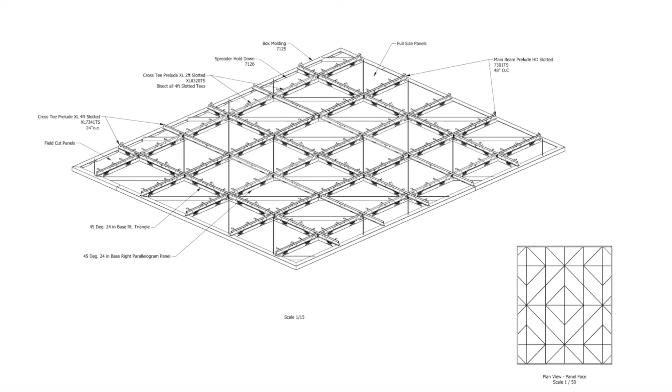For these 2D shapes, let's install a 2x2 prelude grid with slots in the flange to accept torsion spring panels. Mains install on 4-foot centers. 4-foot cross tees install on 24-inch centers, while 2-foot tees bisect the 4-foot cross tees, creating fully slotted 2x2 modules for maximum panel configuration options.

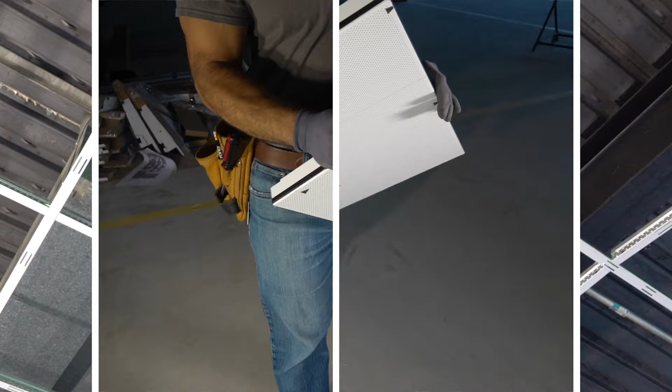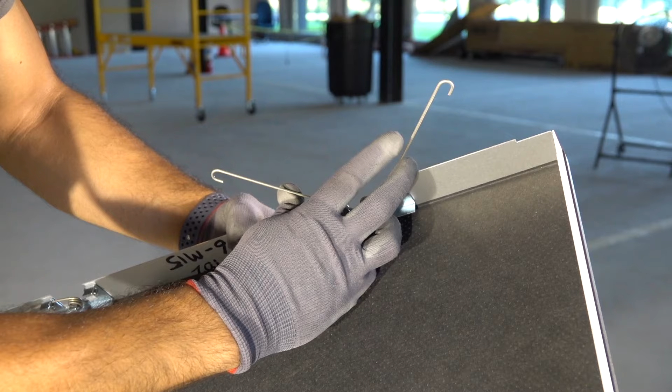Panel geometry starts with new, durable factory-applied gaskets which maintain an 1/8-inch panel-to-panel reveal. Once you release your torsion springs, you'll notice we've added built-in spring stops that protect the panel face should you let go of a spring.

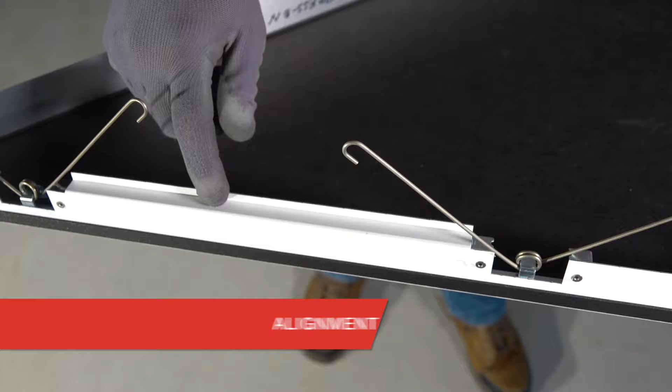Between torsion springs, we've built in an alignment flange to the panel upturn, which ensures perfect panel alignment once the panel is installed.

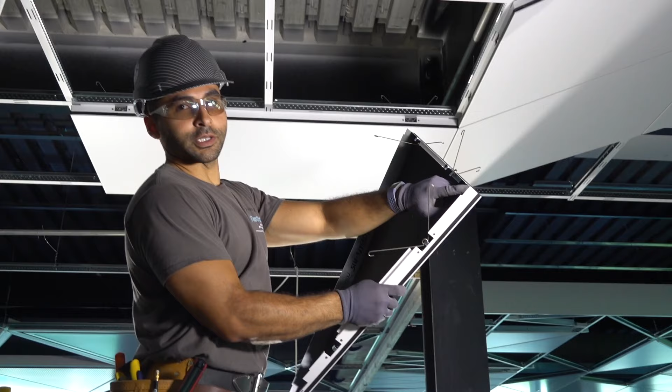Panel corners need to always occur at a grid intersection with the alignment flange fitting securely between the grid flanges. Torsion spring panels engage the slotted grid while lifting the panel securely into place.

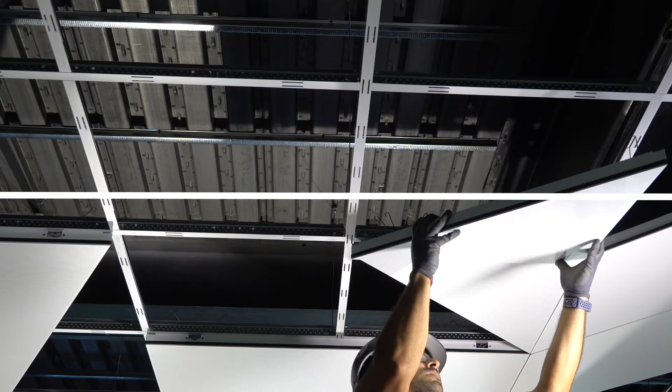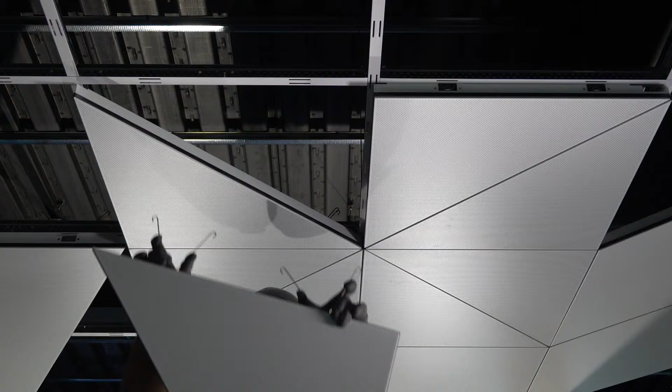Let's work our way around an installation of 8 right triangle panels that converge upon a common center to show how the modular 2x2 slotted grid assembly accommodates off-module panel sizes. 2x2 modules can easily interface with triangles, trapezoids, and parallelograms.

Larger format shaped panels install the same way as the smaller panels that you just saw.

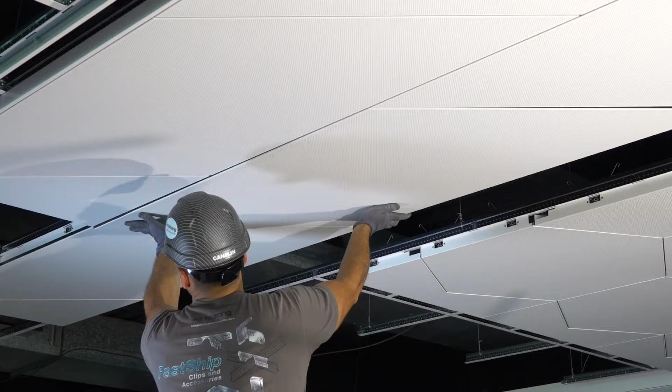Let's move on to hexagon shaped panels. This panel shape also installs to a square module grid system, however the mains and tees lay out a little differently. First, you'll install slotted Prelude heavy-duty main runners on 30-inch centers.

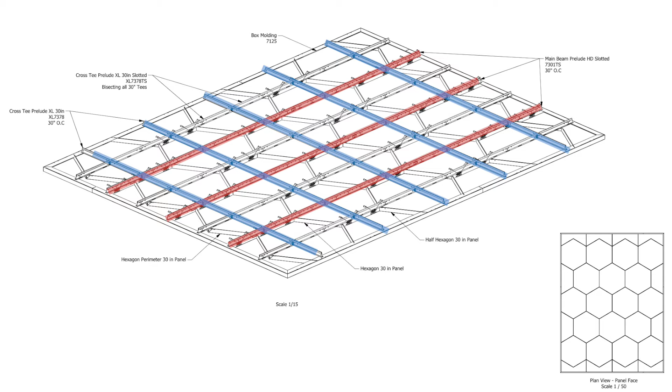Next, install unslotted 30-inch cross tees perpendicular to the mains on 30-inch centers. Finally, you'll install 30-inch slotted cross tees on 30-inch centers parallel to the mains. The resulting 15-inch on center slotted grid spacing, referenced by the red and green lines, accommodates the staggered installation layout of hexagon panels.

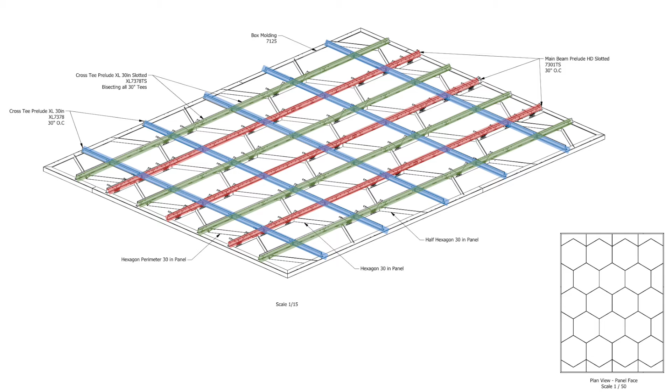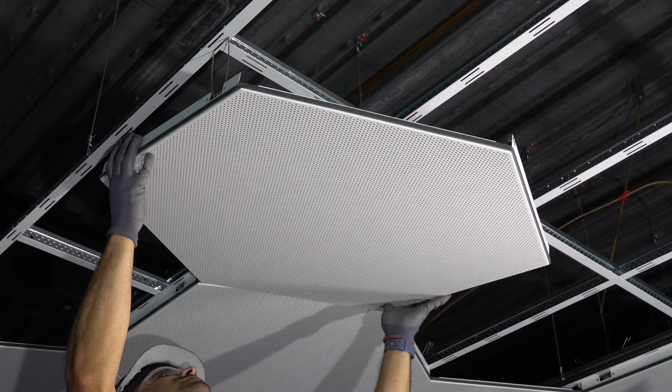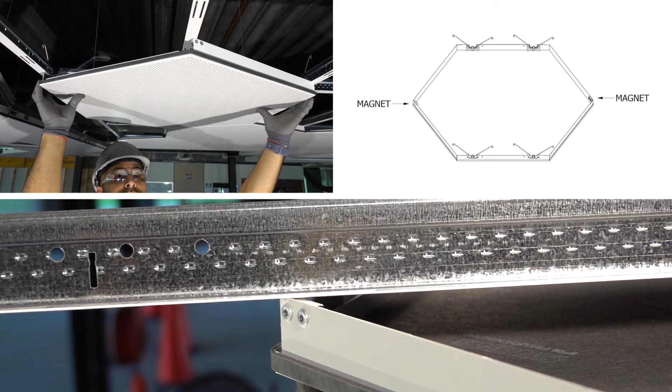Hexagons either hook to slotted parallel mains or slotted parallel 30-inch cross tees, which achieves that staggered panel layout across the ceiling plane. With torsion springs, only 2 panel sides are supported. We also need to support the 2 cantilevering non-spring sides. We do that with strong factory-installed magnets that securely engage to the metal grid system.

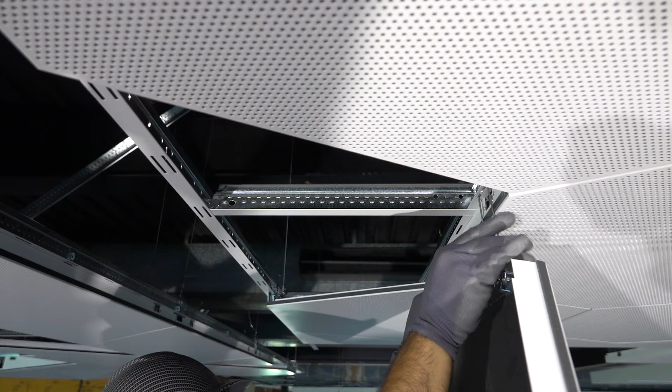Armstrong offers 2 hexagon half-panel shapes for squaring off parallel perimeters of floating or transitioning installations. One half panel is designed to be used down one perimeter run, while the other is used when your perimeter turns 90 degrees.

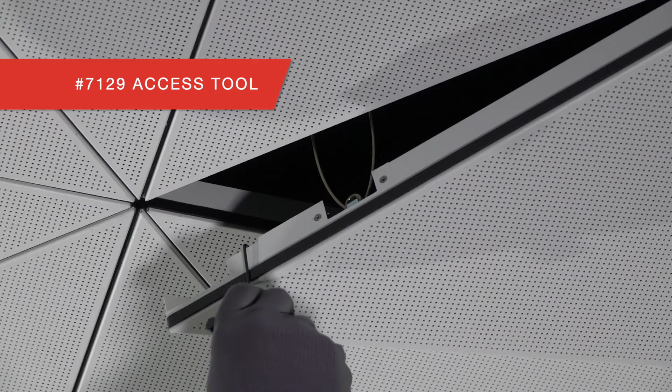Use the Item 7129 tool for accessing any of the MetalWorks Shapes torsion spring panels. Insert the tool at the panel corner where a torsion spring exists. Rotate 90 degrees, then pull downward for easy access to the plenum.

Panels reinstall easily. Now, you don't live life in 2D, so let's go the extra mile and shake up your ceiling topography with 3D panels. The wow factor is built right in. Create dynamic visual landscapes with movement, flow, and fun.

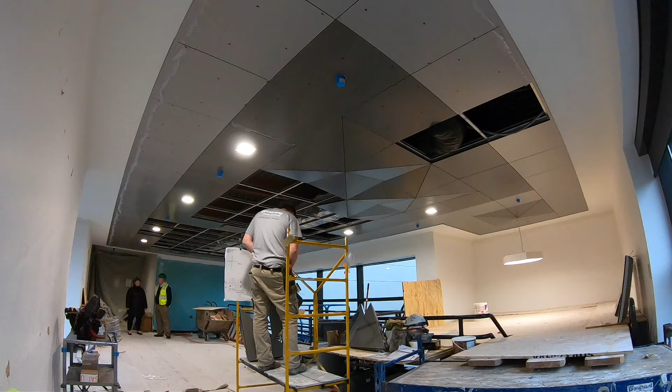Armstrong MetalWorks 3D panels add a true sculptural quality designed to astonish and impress. They are easy to install too.

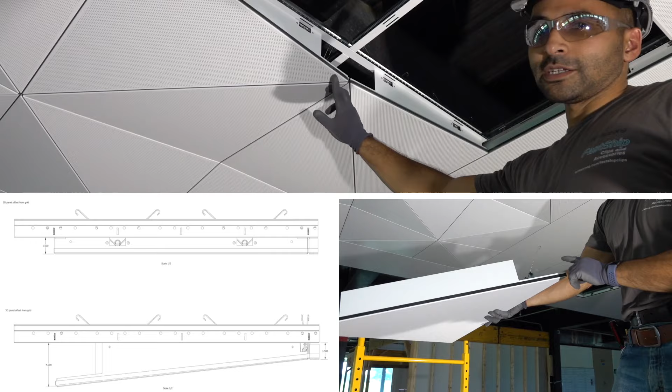Let's take a look. A standard 2D panel has 1.5-inch upturned edges. 3D panels have tapered 4-inch upturns that transition to a 1.5-inch upturn. The combination of these offsets is what creates the sculpted 3D visual.

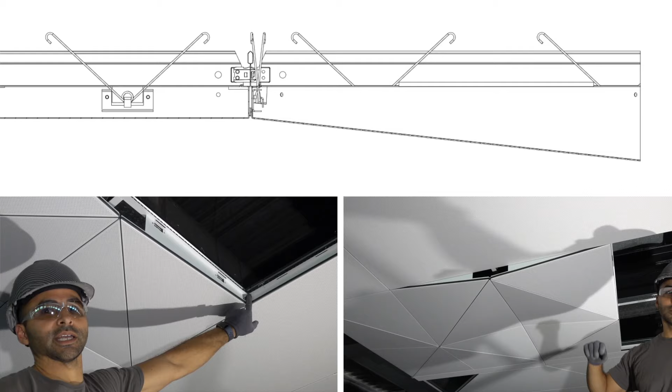You can mix 2D and 3D MetalWorks Shapes panels for maximum design flexibility. Matching panel upturns integrate with opposing matching upturns. Be careful not to mix opposing unmatched panel upturns, or this will be the result. As long as the neighboring panel upturn depth is the same, your installation will flow from panel to panel.

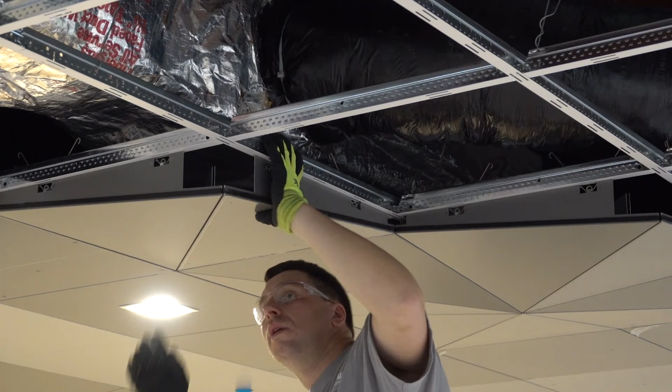3D Shapes panels are only available in triangles. It's the combination of these triangles that achieves the unique sculptural depth.

All MetalWorks Torsion Spring shapes integrate with linear lights and air diffusers by using 4 or 6-inch technical panels. Combine this with partner solutions that are pre-qualified for fit and finish while using standard components.

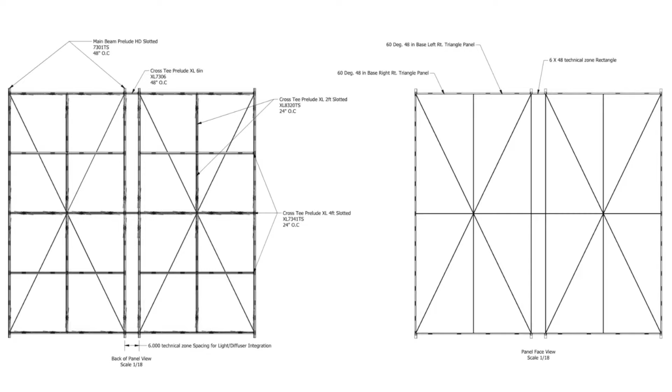For triangles, trapezoids, and parallelograms in 2D or 3D, mains can run parallel to the technical zone. For continuous layouts, the Tech Zone yoke is available. Mains can also run perpendicular to the technical zone.

For hexagon panel technical zone integration, mains must run parallel to the technical zone. Hexagon half panels square off the installation at the technical zone.

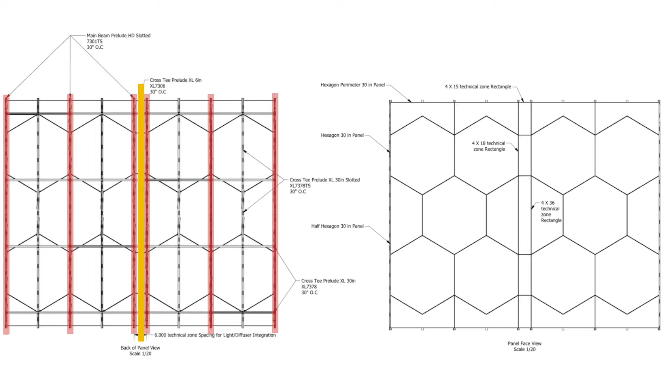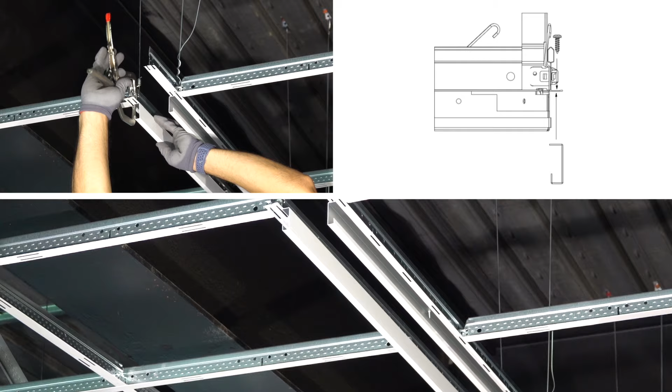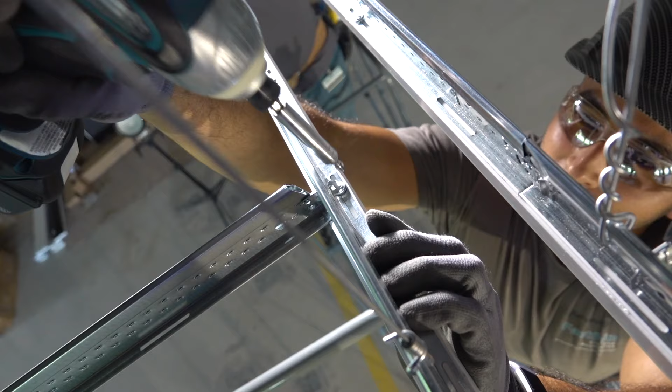If you're going to run continuous fixtures in your technical zones, we offer continuous linear light trim. This beautifully transitions from light to panels while maintaining that crisp 1/8-inch reveal from trim to panel. The trim is easily top screwed into place and it does not interfere with the panel's torsion spring to slot integration.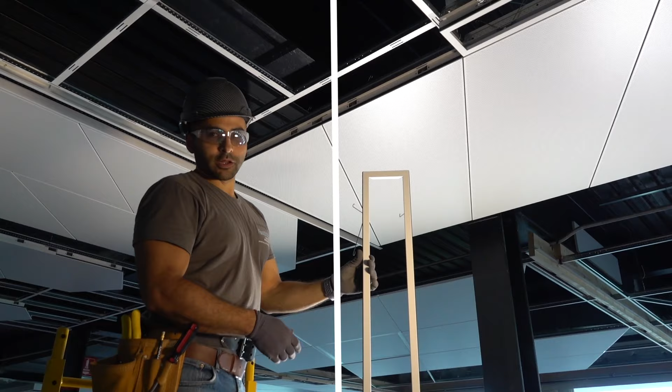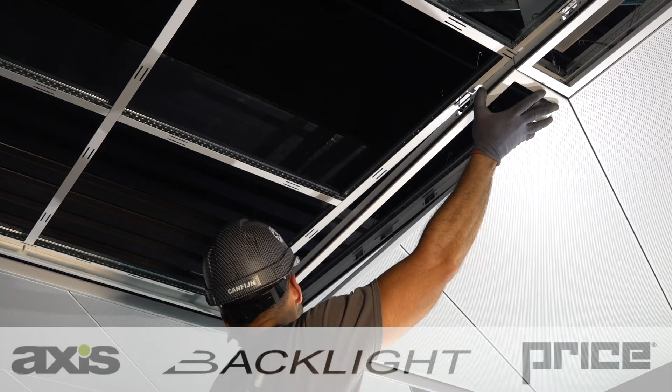For all MetalWorks Shapes installations, we offer metal panels with cutouts for linear technical zone lighting. These install to the technical zone with torsion springs, ready to accept our partner fixtures. Technical zone fixtures will need to be independently supported.

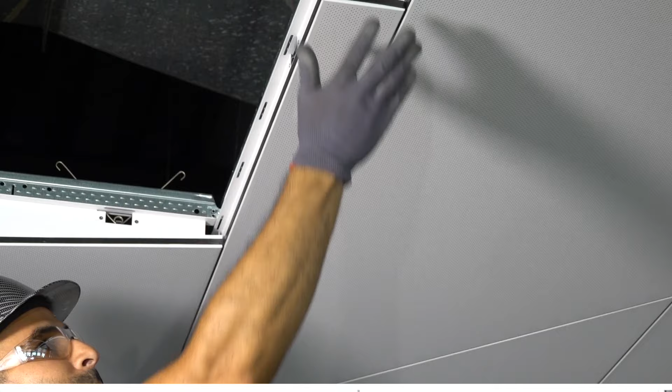Solid torsion spring panels are available for areas with no MEP. Axiom and MetalWorks trims simplify cloud installations.

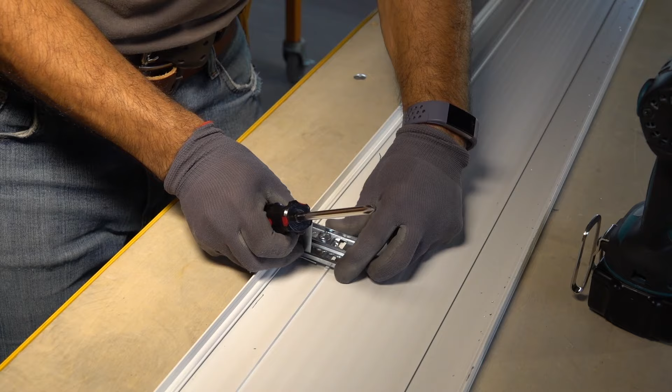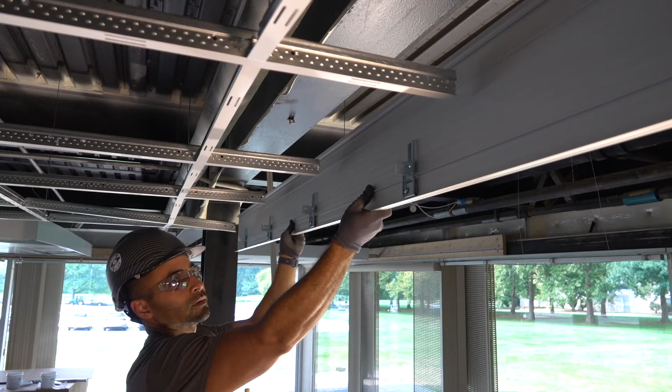The popular ATC adjustable trim clip perfectly trims MetalWorks torsion spring shapes, just like it does just about every other ceiling that we manufacture. Adjust the ATC to your ceiling depth, which in this case is 1.5 inches. Raise up your trim and clamp to your grid on 24 or 30-inch centers. Then screw attach.

Wall or trim perimeter cuts are fast and easy with a metal cutting circular saw.

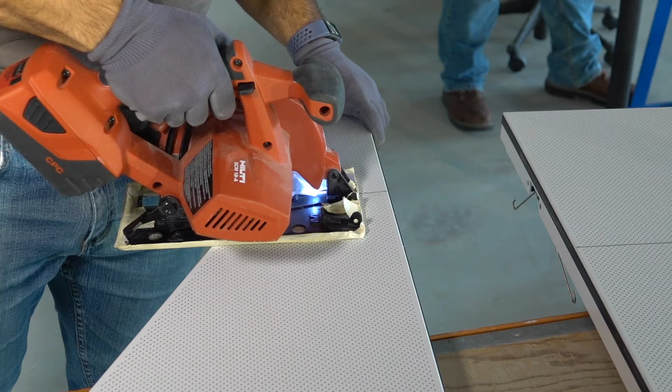The ATC perfectly spaces your grid to allow the 1.5-inch panel the needed clearance to rest on the trim. To press the cut edge evenly to your trim, use the Axiom hold-down clip.

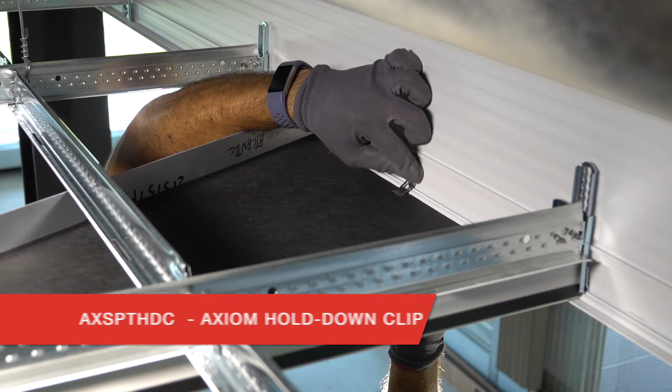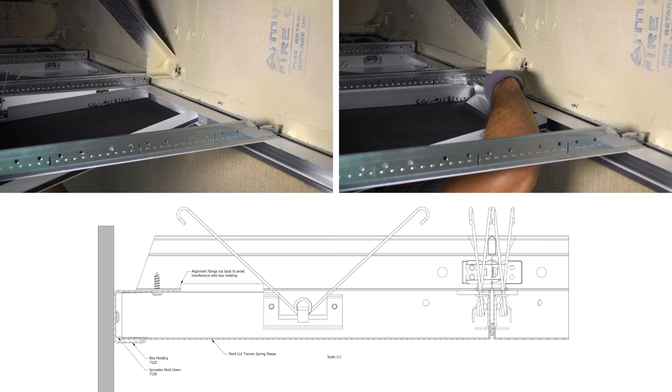Cut panels at the wall rest on box perimeter molding, while cut panels are held into place evenly along the box molding with spreader hold-down channel.